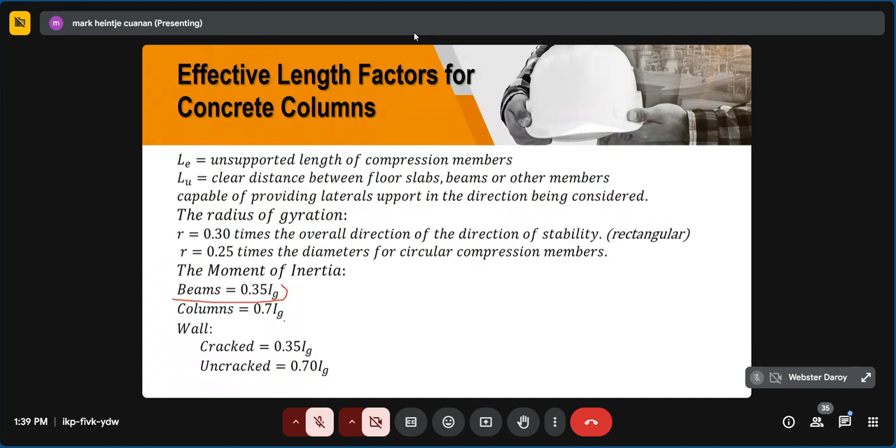So this is the theoretical value of our K, the effective length factor. And so this is the theoretical value. Wherein if you notice here, the values of K, if it is an unbraced frame or column, meaning it is not braced against side sway, it becomes a sway frame.

So the value of K here is greater than 1. For example, if it is sway, if it is a fixed supported column but the upper is swaying, that's 1.2. If it's pinned, 2.2, and if it's like this, swaying, that's 2.2.

But if it is a braced column, braced against side sway, then if you notice, the effective length factor is actually less than 1. So these are the theoretical values.

Wherein we can actually solve the effective length factor using the Jackson and Moreland alignment chart, which is defined by this particular figure.

So what we are going to do here is simply use the alignment chart to get the value of K. So the step that we are going to encounter here is actually solving for our psi.

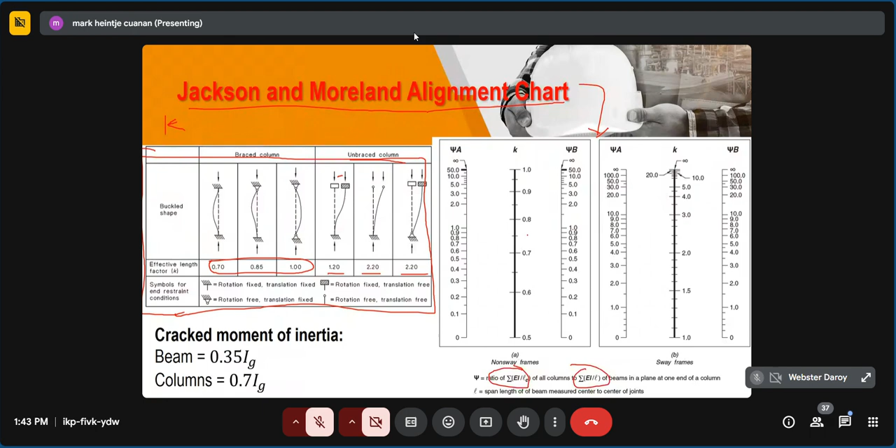So in order for us to solve for the effective length factor, let us use the Jackson-Moreland alignment chart. So, to use this chart, we need to solve first the psi.

Solving for the epsilon, take note, psi is simply equal to the summation of the moment of inertia divided by the length of all the columns, divided by the summation of the moment of inertia of the beams divided by the length of each beam. Take note, the columns and beams we use are dependent on the particular joint we are trying to analyze.

For example, if you are going to analyze this particular joint, you get the I over L for its column, while for the beam, there are two, the left and the right beam.

If you analyze this particular joint, there are two columns, the upper and the lower, since these are connected to point B, and we also have two beams, the left and right direction. The dimensions of all the members are already given, so we can now determine the corresponding moment of inertia of all the columns and beams.

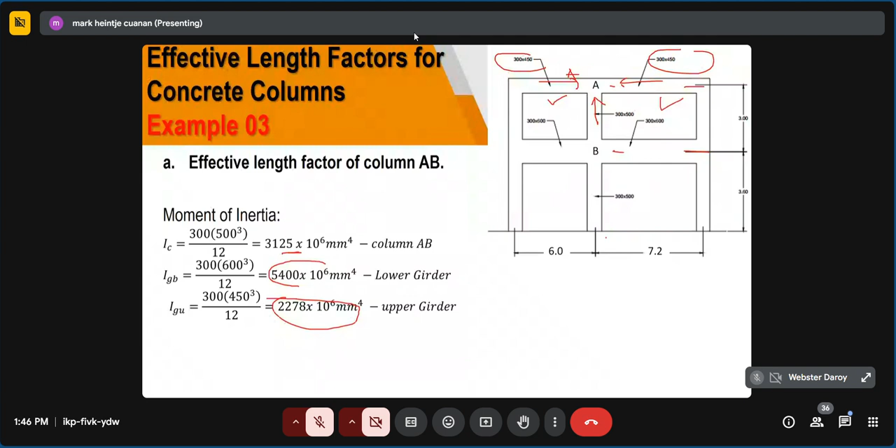And for the beams, the same, joint to joint, using the moment of inertia 2278, multiplied by 0.35 as our reduction factor, divided by the length of 6,000 and 7,200. For this left beam and right beam, the lengths are 6 and 7.2. So using this, we have psi A equal to 2.99.

And at point B, same procedure. But notice in this case, there are now two columns, since joint B is connected to column AB and this particular lower column of the same dimension. So it becomes two times 0.7 of I sub C over L sub C, wherein, same procedure, you use the lower column and lower beam, since these are the members connected to point B of our column arrangement.

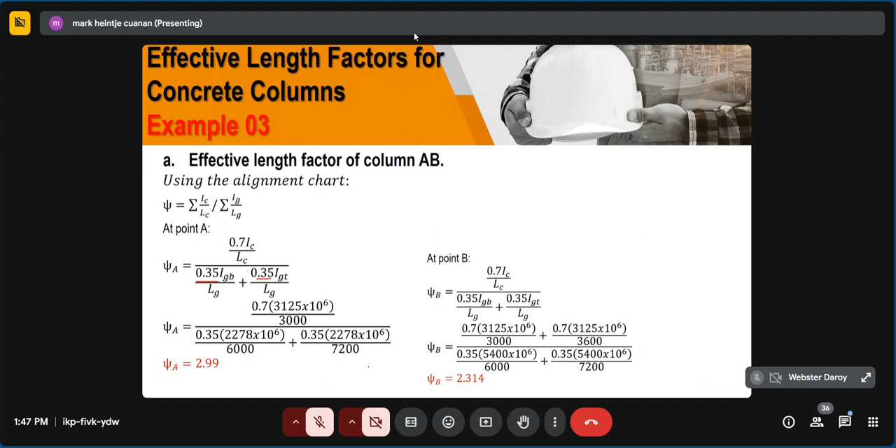So after that, we solve psi B equal to 2.314. And using epsilon A and B, we now plot this on our alignment chart.

In this case, epsilon A is 2.99, so more or less it is approximately at the level of 3.0, while epsilon B is 2.314. So this is 3, this is 2, this is 2.5, the middle line. So 2.3 is more or less there. So in this case, we derive a value of...

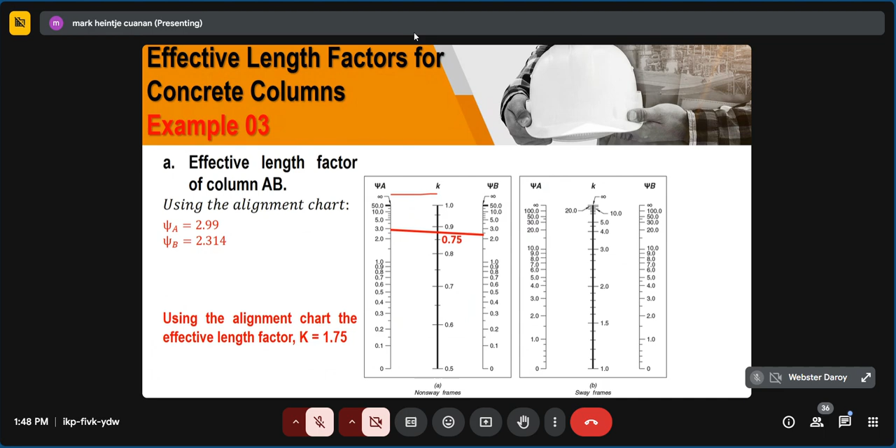0.75 - no, this is not actually 0.75. So more or less, where is it? Let me correct our solution here.

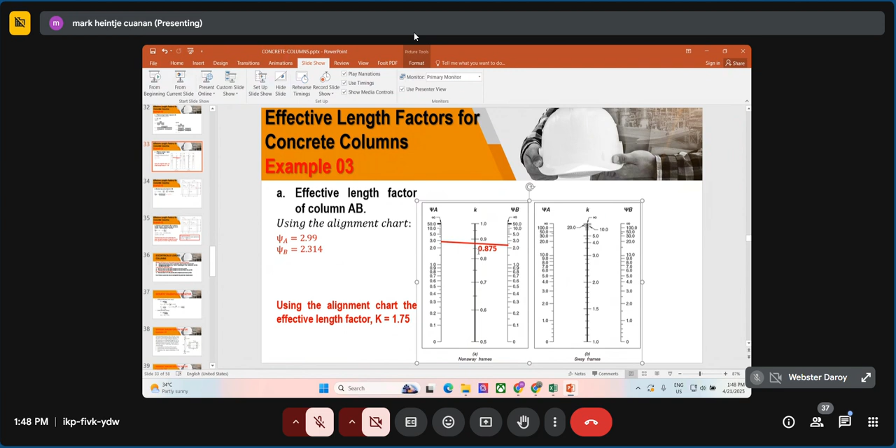So, if this is 0.8, this is 0.85, this is 0.9, maybe this is 0.875. So, 0.875, halfway between 0.85 and 0.9. So the tendency is we will place it here. This is 0.875.

0.875. So, in other words, the slenderness ratio now becomes 0.875 times 2475 divided by 0.3 times 500. Not a slenderness ratio of 14.44, or 34, 38... yeah, 48. Okay, so 14.40. So in this case now, since...

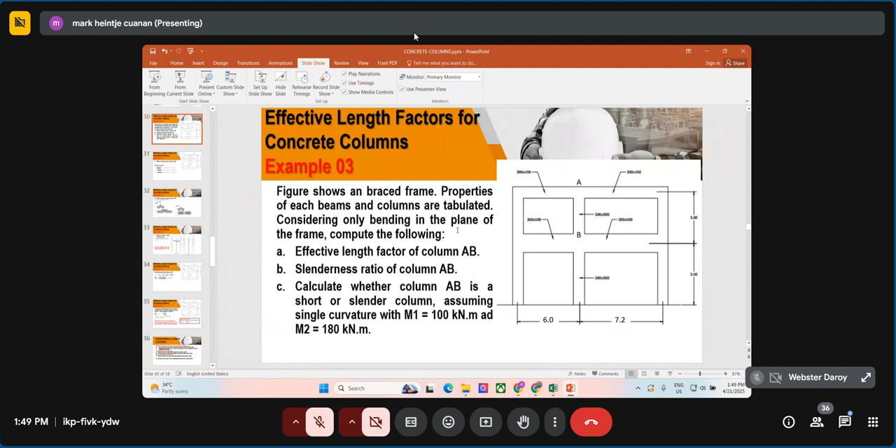The criteria now for braced against or not braced against sidesway... is this it? Or is it not? So braced, so meaning the criteria is this one, this criteria here.

So you will notice that 34 minus 12 times 100 divided by 180, m1 over m2, that is 27.33. So this slenderness ratio KL over R is actually less than 27.33. Therefore, we don't need the moment magnification factor for this matter because the column is still a short column. It is not a slender column.

Therefore, we are not going to consider the slenderness effect. All right, so any question? Do you have clarification so far? Any question?

Okay, so to continue...

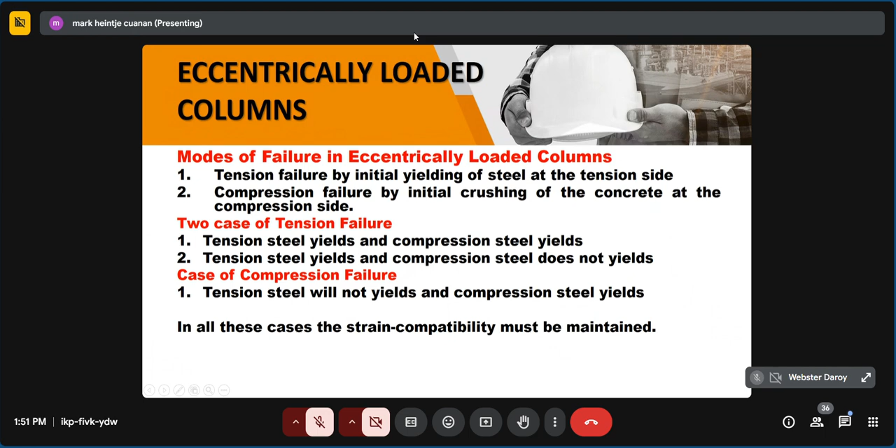Actually, we have a good method here. We have a method wherein we can design the column by simply using the compression block analysis. But in this case we are not going to discuss that one. We are going to go directly on the use of our interaction diagram.

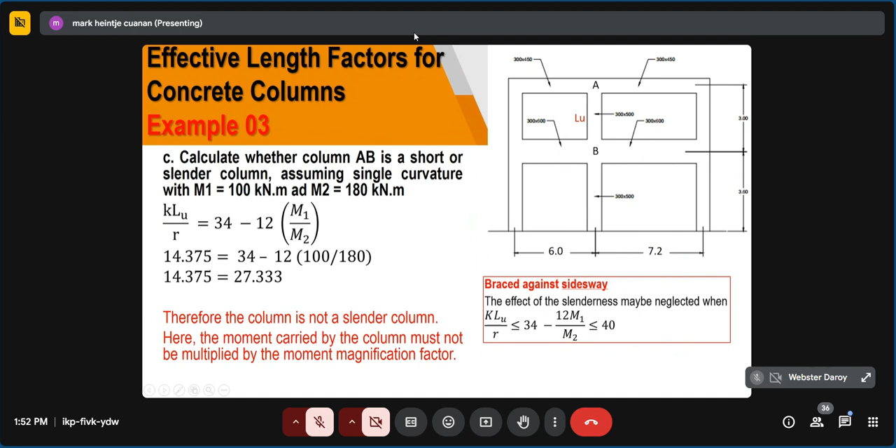Okay, so these are actually the moment magnification factor by which we are going to use as a multiplier to magnify the moment that the column is carrying when the column is actually a slender column. So you will notice that the moment magnification factor is simply equal to C sub m all over 1 minus the PU divided by 0.75 of P sub C.

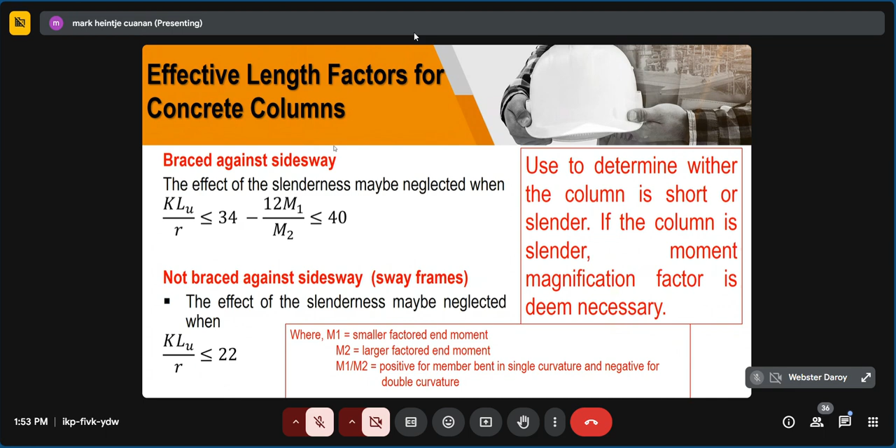Now, if it is not braced against sidesway... if it is not braced against sidesway, meaning the criteria is actually this one. So, braced against sidesway. So, this is braced, meaning it has no sway. And this is the unbraced case.

Okay, so if you notice, the C sub M here is simply 0.6 plus 0.4 of M1 over M2, and it should be greater or equal to 0.4, especially if the curvature is double curvature, where the tendency is this becomes negative. So there's a possibility this becomes below 0.4. If that would be the case, use 0.4 because this is actually the limiting factor.

Now the P sub C is the critical axial load, using Euler's compression formula. That is pi squared E sub C I all over (KLU)^2. Now the E I here, the flexural rigidity, is not automatically the long formula value you substitute directly, but rather you use this as your E I.

Okay, so the value of this is 0.4 of E sub C I all over 1 plus beta DNS. Okay, and then if it is braced against sidesway, it is non-sway, then the critical moment is simply the maximum. There are two moments carried, M1 and M2.

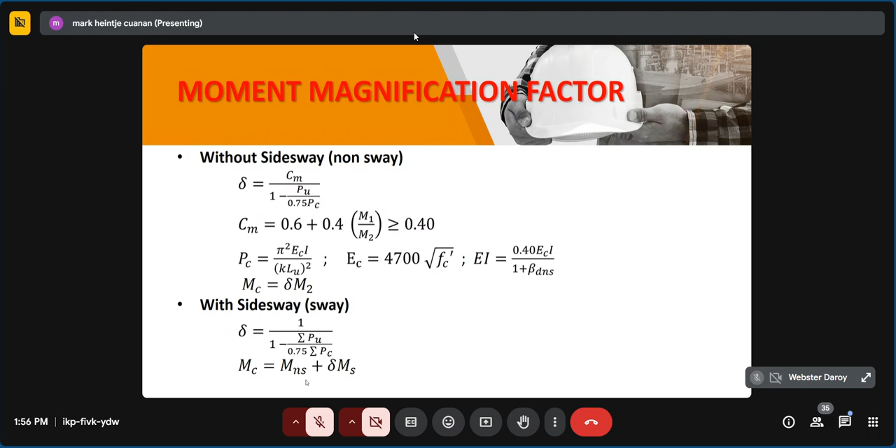So for example, solving for the moment magnification factor, here we have this particular example.

A tied column shown is 300 by 375. It is to be used in a frame braced against side sway. The column is bent in a single curvature about its y-axis and has an unsupported length of 4.8 meters. Assume that K is 0.83, meaning in this case we don't need the alignment chart to solve for K since it is already given. The column carries an unfactored dead load axial load of 134 kilonewton, and we use FC prime as 27.6 megapascal and Fy as 414.6 megapascal. The column is a normal weight column.

So what we are going to solve is: compute the critical load of the column, compute the moment magnification factor. Therefore, obviously this is a slender column, so we need to solve for the moment magnification factor. And lastly, we compute the eccentricity of this particular load.

For the critical load, we use P sub C equals pi squared EI over KL squared, wherein for the Young's modulus of elasticity for concrete, that is derived by a value of 4,700 times the square root of FC prime. This will give us a Young's modulus of elasticity of 24,692 megapascal. And for the moment of inertia, we have BH cubed over 12.

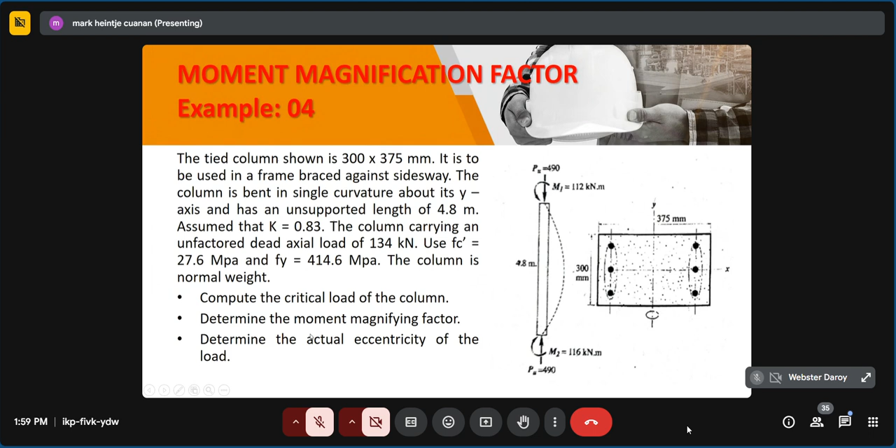And the beta DNS is simply equal to 1.2 of the dead load over the ultimate load that the column is carrying. In this case, P sub U is already given, that is 490. While the dead load, unfactored dead load, is 134. So we factor out that dead load, that would be our sustained load, and the P sub U is the ultimate load.

Meaning beta DNS is simply equal to the sustained factored load divided by the total compression load. This gives us a beta DNS of 0.328, meaning the flexural rigidity we are going to use here, using the formula 0.4 EI over 1 plus beta DNS, gives us an EI of 9,805.4 times 10 to the power of 9.

So, meaning in that case, if we substitute the value, we will have a critical axial load of 6,097 kilonewton.

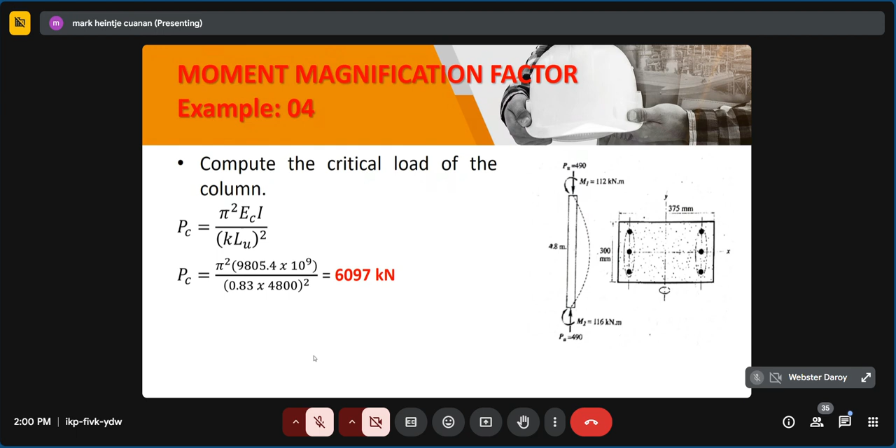For the moment magnification factor, first, before solving for it, let us check whether it is a slender or short column. Substituting the value of KL over R and also M1 over M2, we will notice that 35.41 is greater than 22.41. 22.41 is our criteria here, so meaning if it is less than 22, then it is not a slender column. Since it exceeds, it is a slender column, so we need to solve for our moment magnification factor.

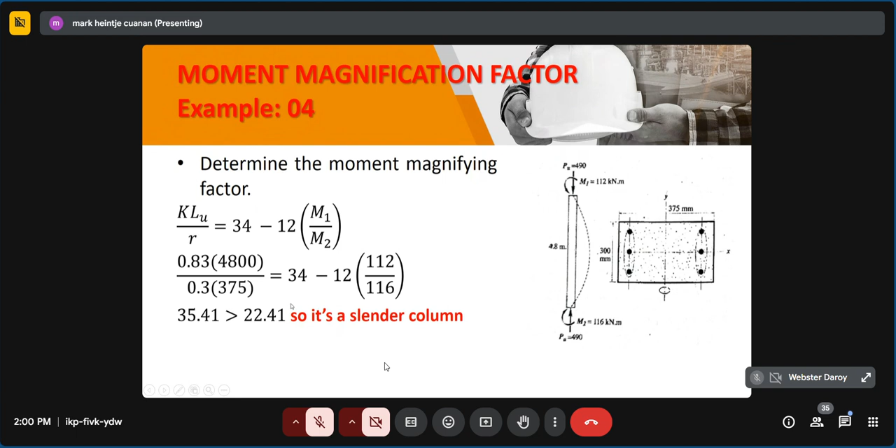In this case, we have C sub m equals 0.6 plus 0.4 times M1 over M2, and that gives us a value of 0.9862. We use that to solve or to evaluate our moment magnification factor, so C sub m is 0.986.

The moment magnification factor now becomes Cm over 1 minus PU divided by 0.75 PC. This gives us a moment magnification factor of 1.1.

Since it is braced against sideway, all you have to do is multiply the maximum moment by the moment magnification factor. That becomes 1.1 times 116. We have two moments here, 112 and 116, but 116 is larger, so that's the one we apply the moment magnification factor to.

So instead of designing it using the actual moment of 116, we are going to design it based on a critical moment of 127.6, because the excess accounts for the slenderness effect.

Since we already know that moment is simply equal to the concentrated load times the eccentricity, therefore eccentricity is simply moment divided by the actual load. This gives us a value of 260 millimeters.